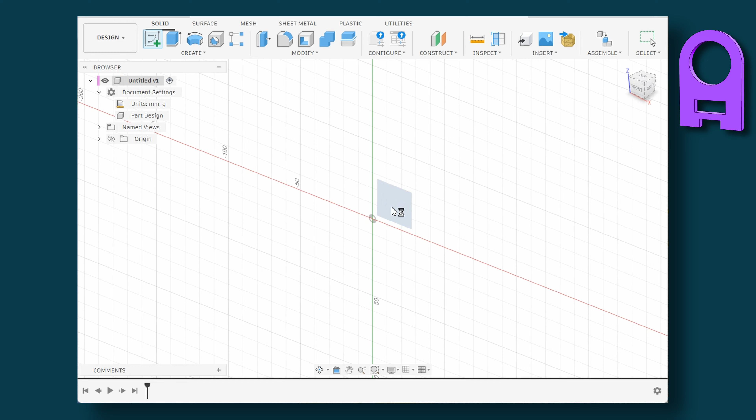Open Fusion on your computer. Start a new sketch and place it on the front plane. This will automatically rotate your view to the front, as shown by the cube in the top right corner. Use the circle tool to draw a circle on the y-axis. Set the diameter to 40 millimeters.

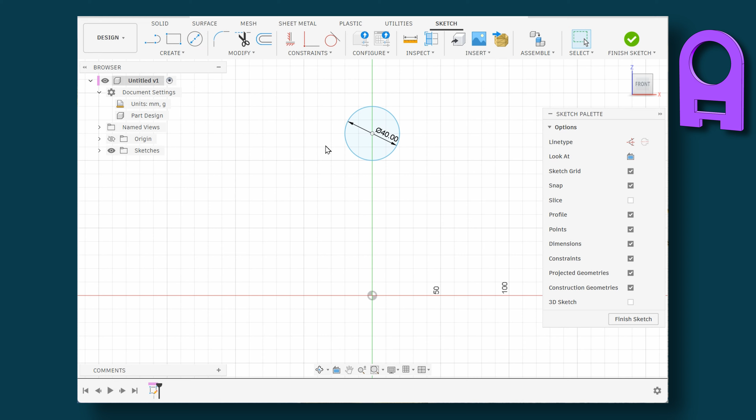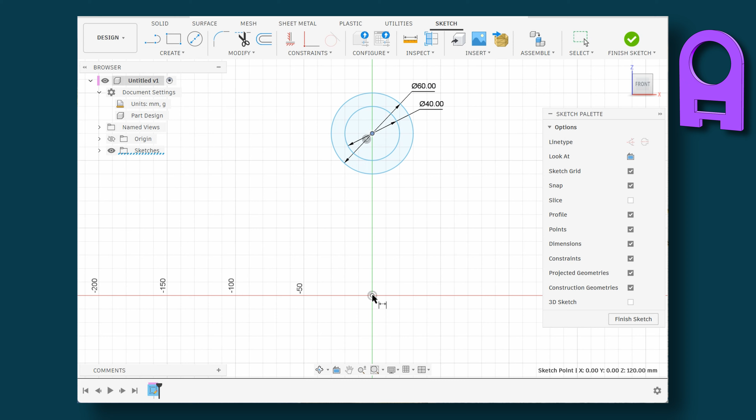Draw a second circle, centered on the first one, and set its diameter to 60 millimeters. Next, go to Create and select the Dimension tool. Select the center of the circle, then select the origin point. Set this dimension to 60 millimeters.

Now select the Line tool. Start on the left side of the circle. Draw a line down to the x-axis, then to the right, up, to the right again, down, and to the right once more. Finish the line by connecting it back to the circle.

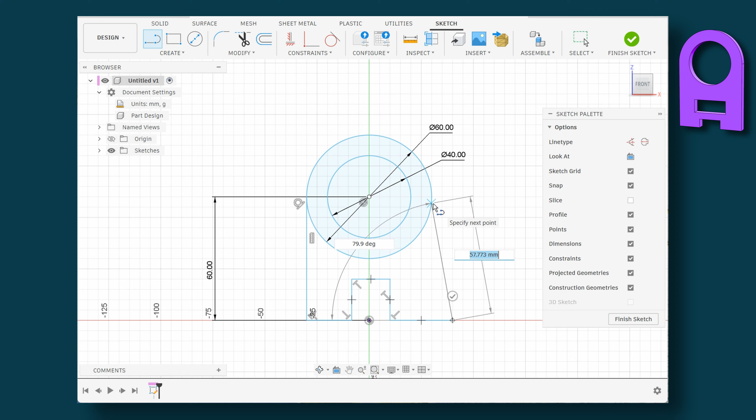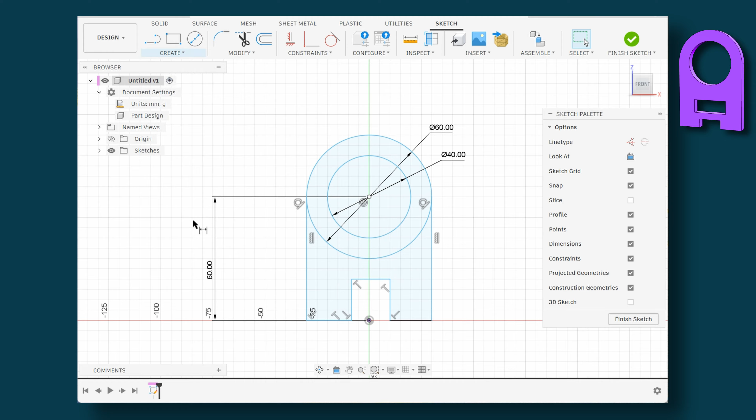Select the line on the right and the outer circle. Go to Constraints and set them to Tangent. Select the line again and make it vertical. Perfect. Now use the Dimension tool to set the remaining values. Set this horizontal line to 20 millimeters. Set the vertical line to 8 millimeters.

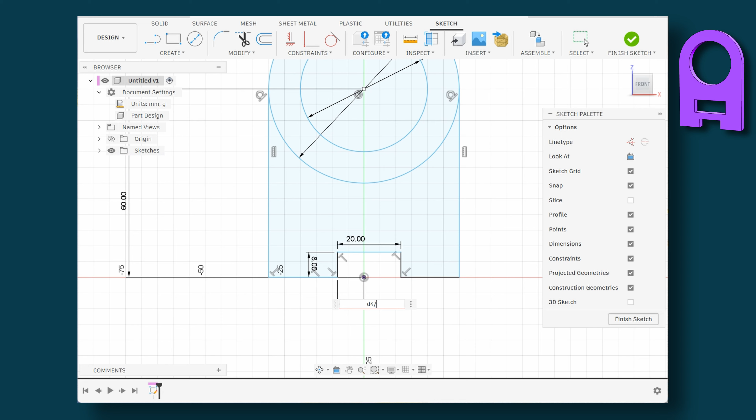To center this cutout, select the vertical line and the origin point. Enter 10 millimeters, or select the 20 millimeter dimension, and type divided by 2. Fusion will calculate it for you. Well done. Now use the Trim tool to remove the lower part of the outer circle. Perfect. The sketch is now complete. Click Finish Sketch.

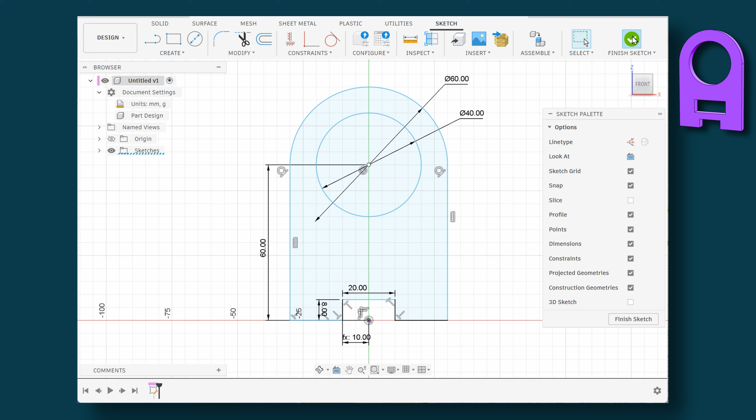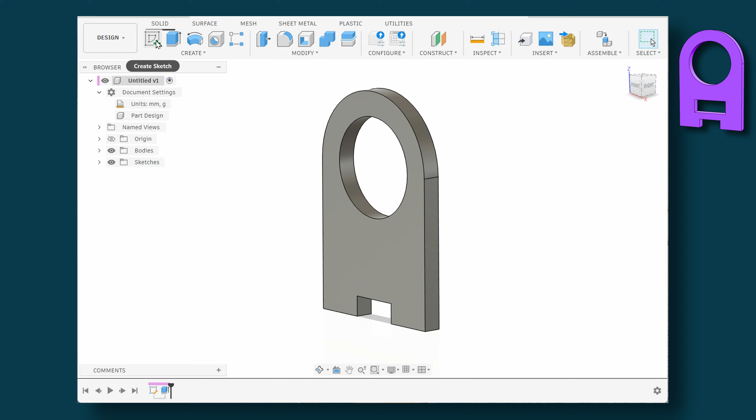You can rotate the view using your mouse, or the cube in the top right corner. Next, use the Extrude tool. Select the contour, and enter 7 millimeters. Perfect. Now select Sketch again, and place it on the front face of the body. Draw a rectangle.

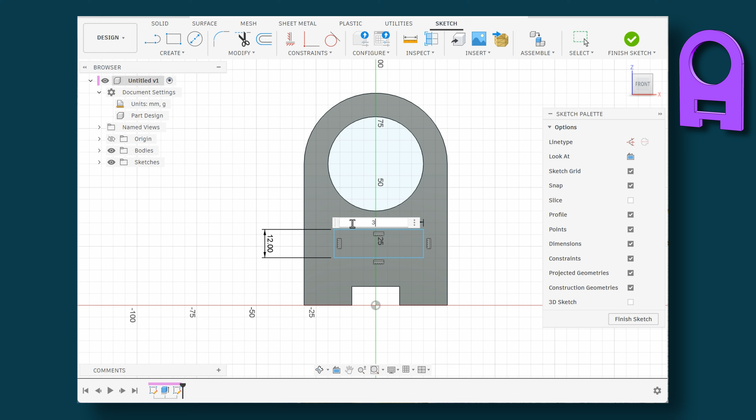Go to Create and select the Dimension tool. Set the vertical line to 12 millimeters. Set the horizontal line to 30 millimeters. Set the distance from the lower line to the origin to 14 millimeters. To center the rectangle, select the vertical line and the origin point. Enter 15 millimeters, or select the 30 millimeter dimension, and type divided by 2.

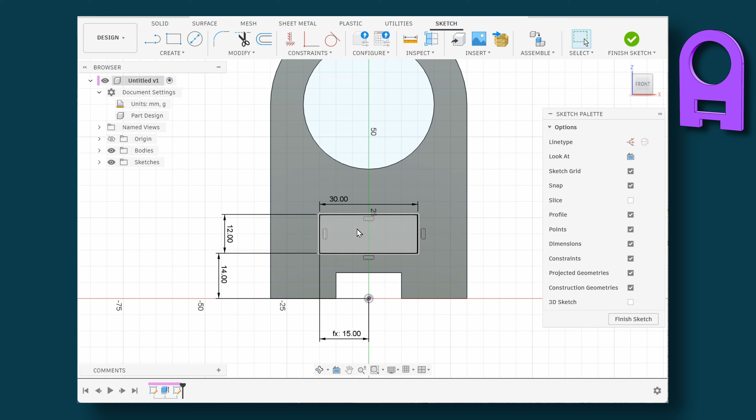Now click Finish Sketch. Rotate the view. Select Extrude, and pull the arrow through the body. This will automatically set the operation to cut. Well done. Your model is now complete.